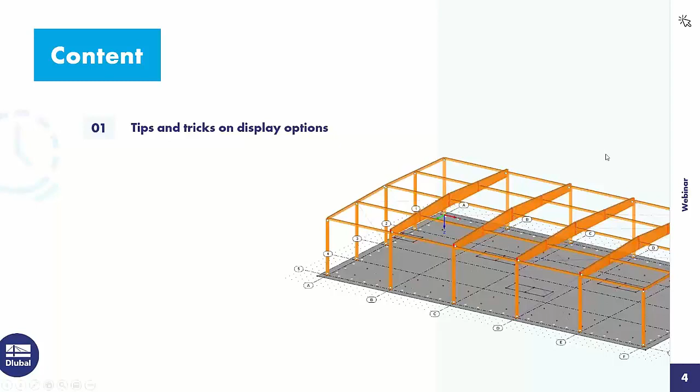To the agenda today: I will introduce some tips and tricks on display options, also on the printout report, and basic information. I will do a single and mass print of graphics to the printout report. And I will show how to create a verifiable printout report. We turn directly to the program.

In RFEM, that's a storage building made of timber and a reinforced concrete floor slab, with bracings from steel. The model is completed and designed: the timber structure and also the concrete structure. We can go through the load cases: self-weight with roof loads and single loads from racks, snow load, the imposed loads with loads from forklifts and from the racks.

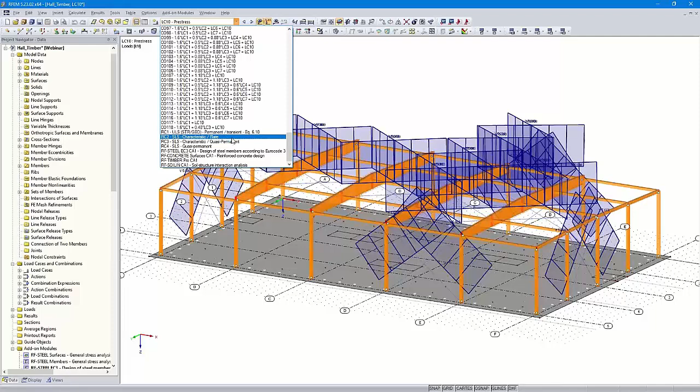Wind in X direction and Y direction. Imperfections in X direction and Y direction. Pre-stress. And then there are a lot of load combinations that are automatically created by the program. Also four result combinations: one for the ultimate limit state design, three for the serviceability limit state design. Then the design of the steel structure. Those are only the bracings. You can see a design ratio of 55%.

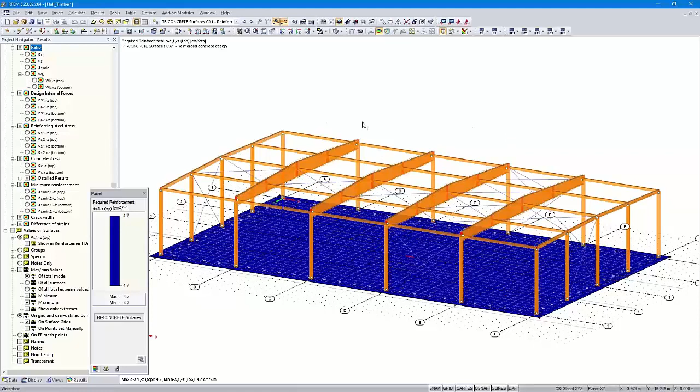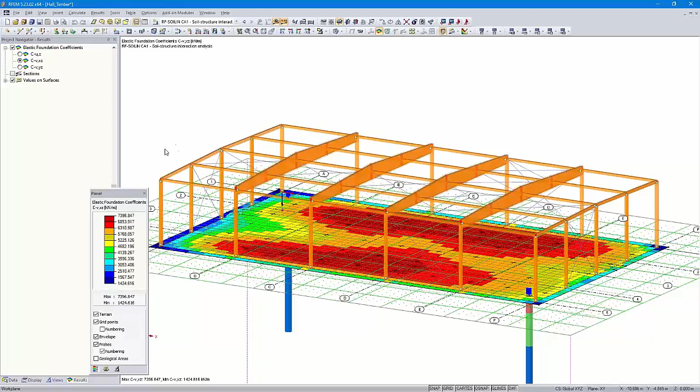Then the concrete results, also for the floor slab. Then the results of the timber design. Here you can see a design ratio of 94%. That's in the horizontal beam here, the maximum design ratio. Then I used RF-SOILIN to determine the elastic foundation coefficients. But we want to start with the member results. We want to print them in the printout report.

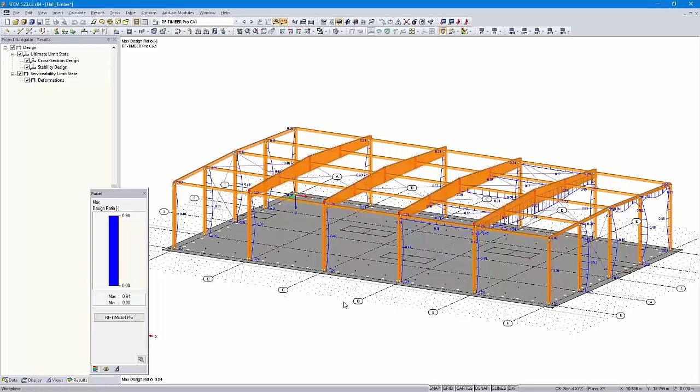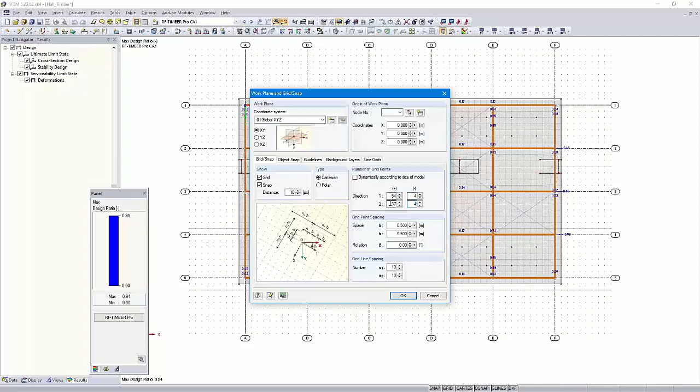But at first, I would like to move the axis designations closer to the model. I can show you how to do that in the top view. We go here with a right click in the grid options, edit. Here 'dynamically according to size of model' is checked. We uncheck it and then I subtract 5 here. Then you can see the axis designations are closer to the model.

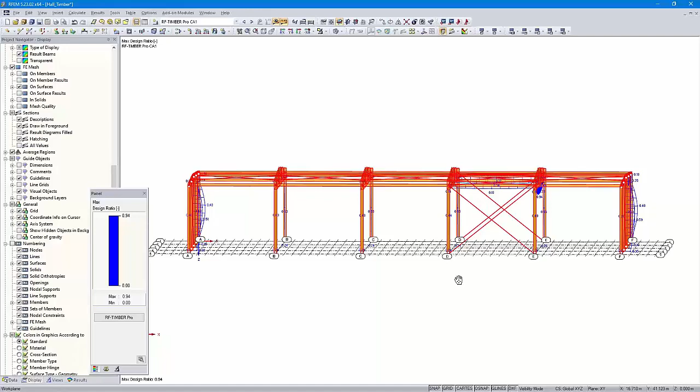You can also hide the axis in the display navigator under guide objects; you can uncheck the line grids and the axis would be hidden, but we would like to show them and document them. Then I make only the timber structure and the steel structure visible with the option visibility by selected objects, and the concrete floor slab is hidden.

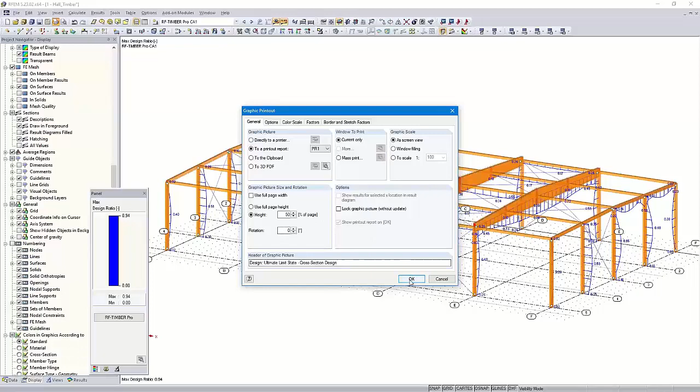Let's print that graphic in the printout report. Here above, print graphic to the printout report, the current only as screen view, that's the option I will use. Then the height, 50% of the page, no rotation, and I confirm that. Usually we would print the graphic with this option here for the printout report, input data and reduced results. But you can also use other options.

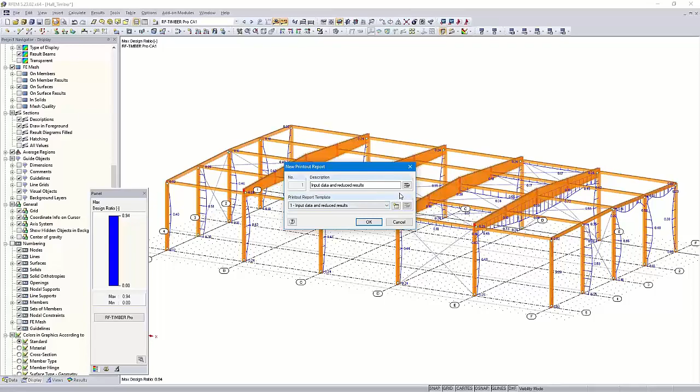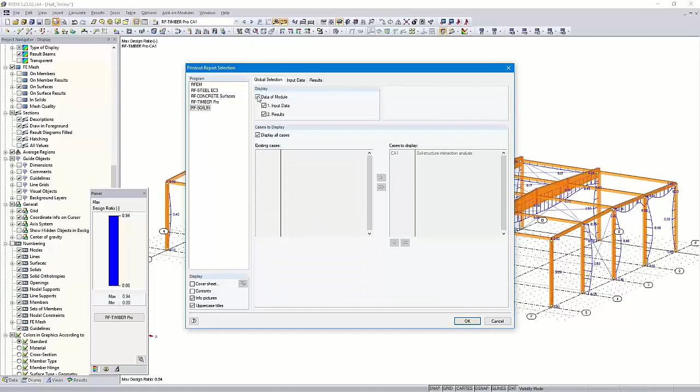But in that case, I would like to disable a lot of pages because we want to print the graphics first in an almost empty protocol, or in a protocol with not so many pages, and therefore I disable here the RFEM data and the RF-STEEL data. I leave the concrete and timber data because we would like to print graphics in those chapters. And now a printout report with only a few pages is created.

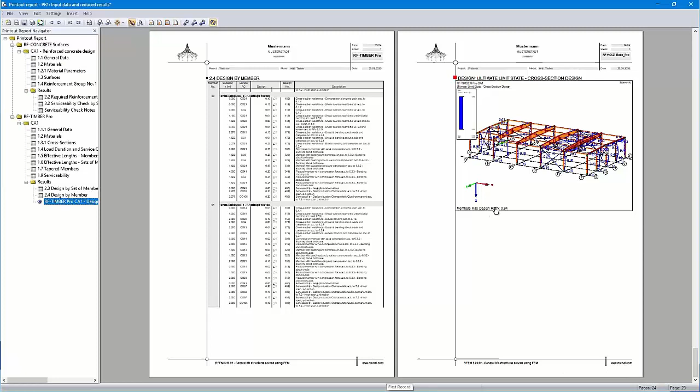At the end, we will have more than 170 pages. Now there are only 24, and the handling of the graphics is much better. We can see that the graphic is quite confusing, but we can modify that afterwards. By right click, I can open the properties and rotate the graphic. At first I use the full page height and rotate the graphic 90 degrees. Quite better, but I'm not satisfied with this graphic.

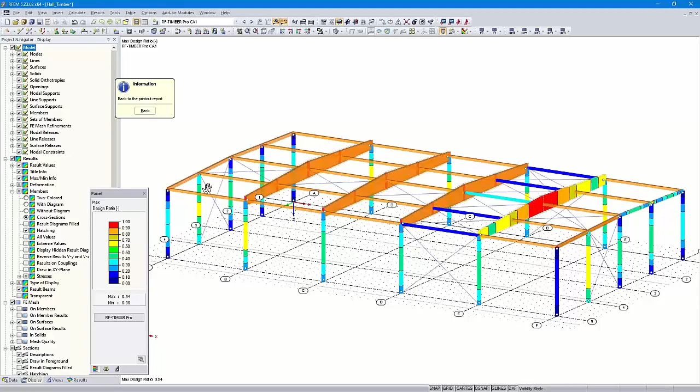I will change it here with right click and edit. I go back to RFEM, and then I can set in the display navigator under results, members, the option two-colored. That's the current state. Then with diagram, it's colored here. Then without diagram, and cross sections. I think that's a good overview. You can see the maximum design ratio is in the horizontal beam here, and I can go back to the printout report.

Okay, that graphic is much better. We will use it, and we would like to print that graphic of the axis E separately in the printout report. We leave the printout report with saving that graphic.

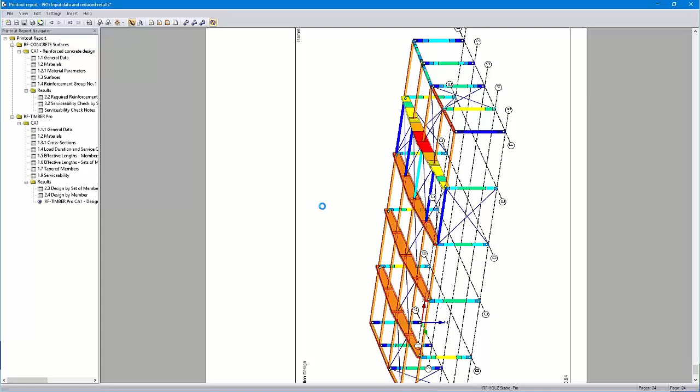Then I create a new visibility. I use this option here, it's the same as when I click on the right mouse key, visibility by selected objects.

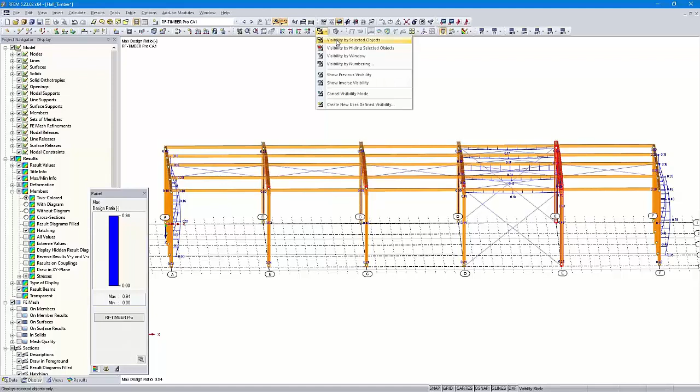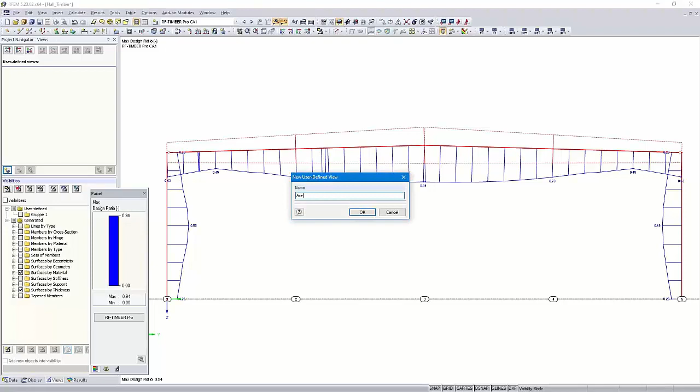I use the wireframe display mode, and we can create a view. For example, here, create a new user-defined view. I can call it axis E.

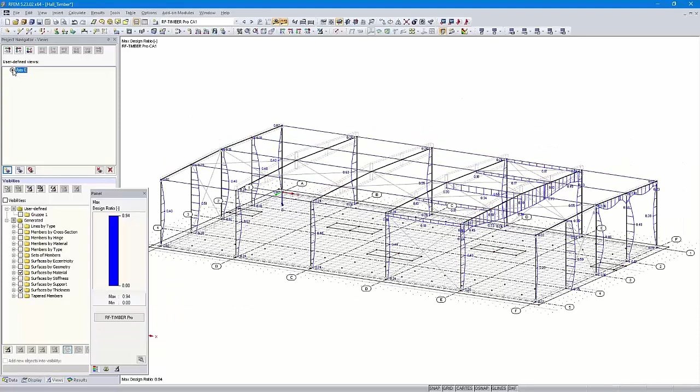You can go back easily later to this graphic. I'll show you - I cancel the visibility mode, for example this view, and I click here to axis E and come back to this graphic.

Here you can see the 94% design ratio. We print that graphic, that's quite easy now.

Now also that graphic is created. It's quite sufficient. I could make the panel smaller here with properties.

I can use a color scale and width of 20, at 20%.

That looks better. I could move that to the right side a little bit, but I don't do that. We leave the protocol with saving the graphics.

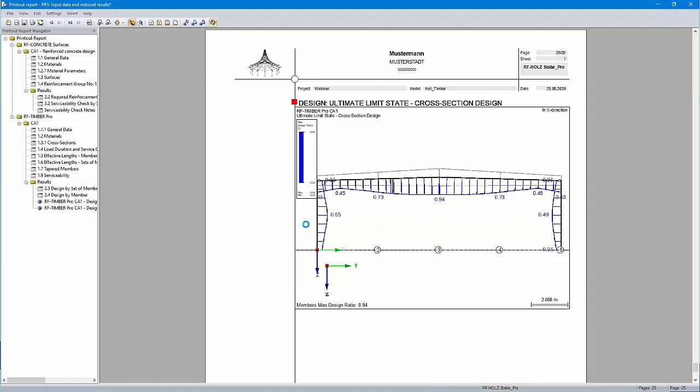And then we print the reinforcement results.

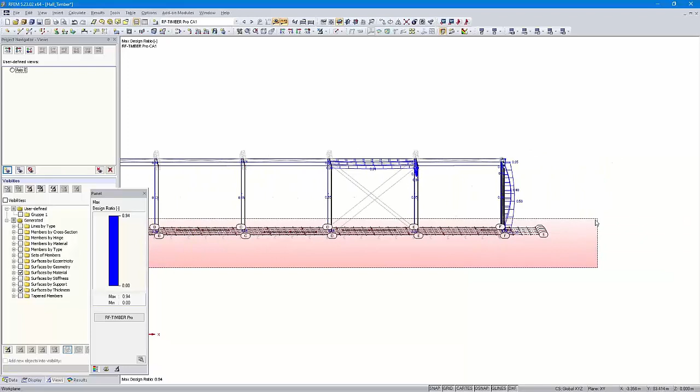I choose only the concrete floor slab in the view. Just a moment.

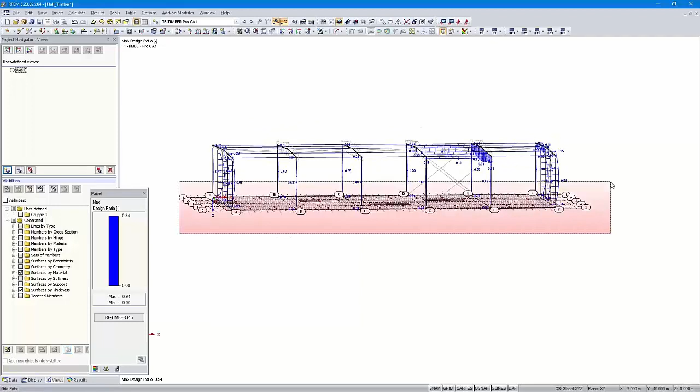A view in Z direction.

A small tip: when you zoom in and out in a graphic with the mouse wheel, you can see steps. If you want to zoom in and out without steps, you can press the Shift key and the middle mouse key, then move the mouse back and forward, and you can zoom in and zoom out continuously. Just a small tip.

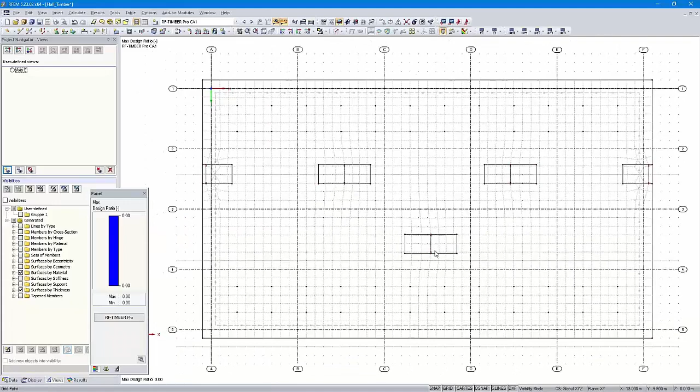Then we go to RF-CONCRETE Surfaces and the results.

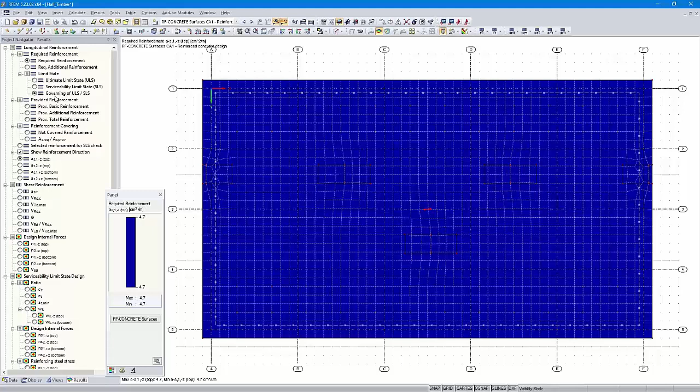Those are the right results, governing of ultimate limit state and serviceability limit state. You can see there are almost the same values in the concrete floor slab because of the restrained design.

I use in this webinar the graphic of the ultimate limit state design. The graphic has more different values.

You can see here the values between 0 and 2.7, and 0 and 2.8. Those graphics are more informative.

Okay, I could print that graphic. That would be absolutely sufficient. But I would like to do a task that is more difficult.

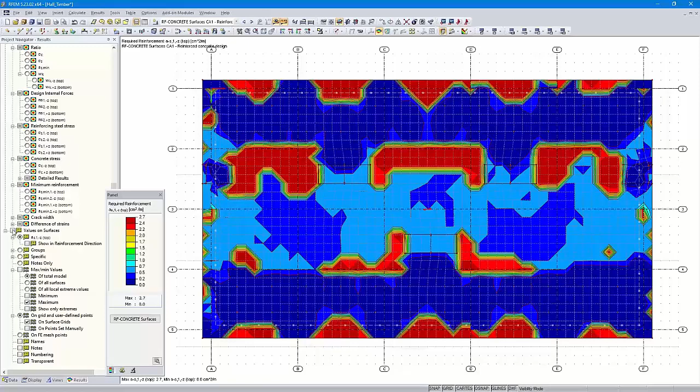I would like to print a graphic with all values in all grid points. I check here values on surfaces, on grid and user-defined points. And when I have got here all values, I can use here not the ISO bands, but the ISO lines.

Then I test the print. I print the graphic. I use the full page height and rotate it 90 degrees, and we will see how it looks like.

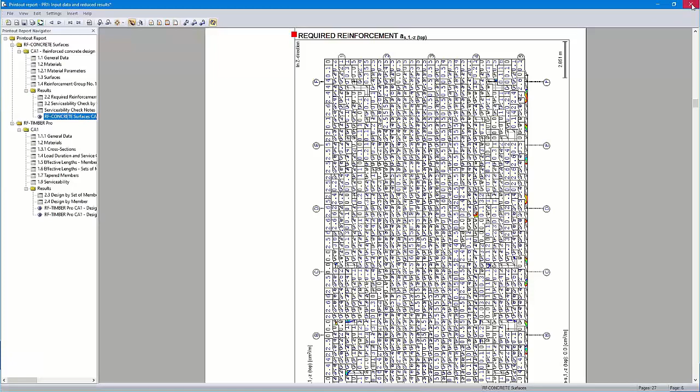Now we can see the values are too large. The graphic is quite confusing, and we leave the protocol without saving.

By right-click at one value, we can open the display properties, and we are at the right place here, result values on surfaces. We can change the settings here separately for the screen and the printout report, but we can also use identical settings for both.

We change only the settings for the printout report. I use here for the values the black color.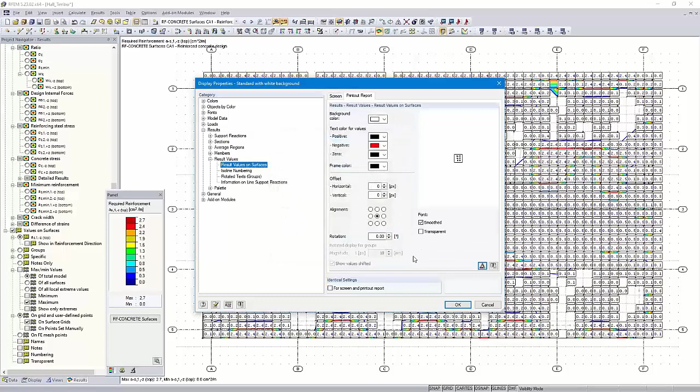Then I delete the arrow here. Then I move the values to the middle of the grid point, and I change the font size to 4. That's in German because my Windows is in German, but it doesn't matter. So, okay.

And then we print it again, same settings. Just a moment, and then we will see that it looks much better now.

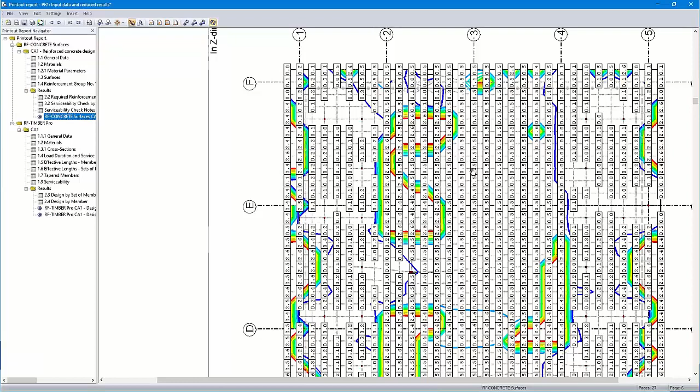Yeah, now we can read all the values here. At least for a PDF print, it would be absolutely okay.

Then we leave the printout report because I would like to show you a mass print only for 4 pages, for the 2 directions here, and for the top and the bottom means the reinforcement.

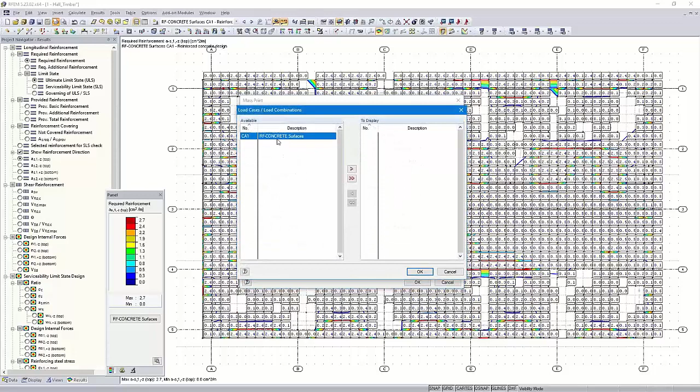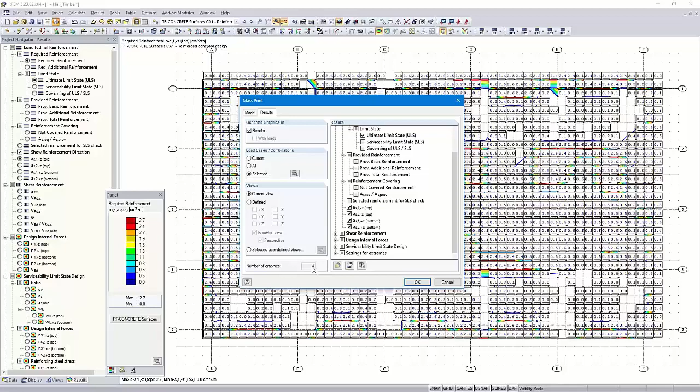I go here to print again and choose here mass print. I change the mass print settings and select the concrete surfaces, module data, choose here ultimate limit state design and AS1, AS2 for the top and both for the bottom. I could also add other graphics, but for this example, 4 pages or 4 graphics are sufficient. You can do that the same way if you want to print more graphics.

The mass print works for member graphics or graphics with member results as well, but I would like to show you the function for the surface results. Okay, just a moment, and then all graphics are visible.

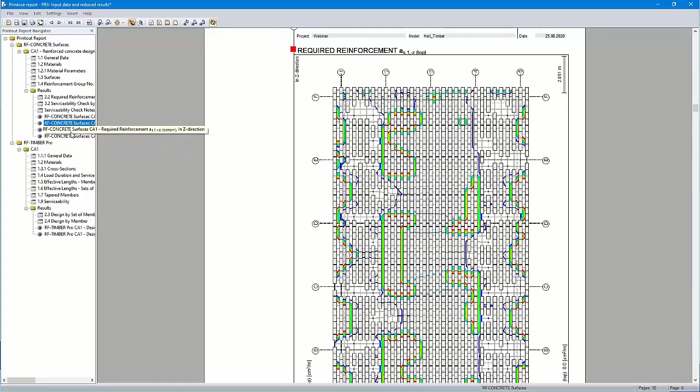I click our graphics here. You can see it's okay.

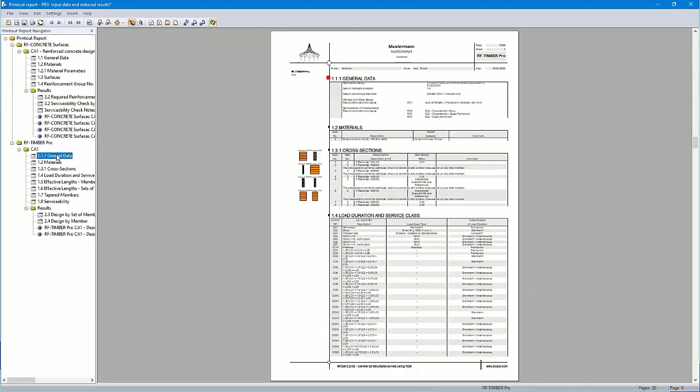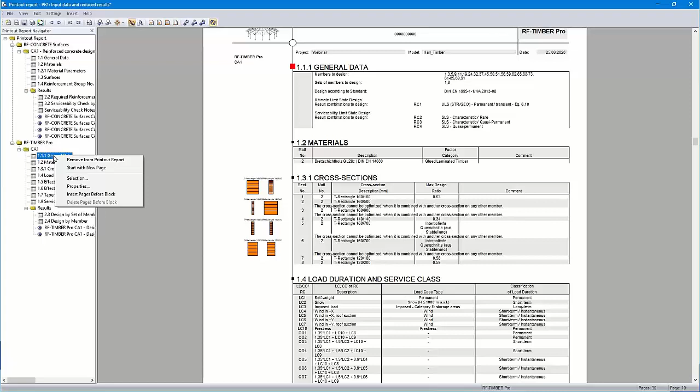Okay, a small tip. For example, if you want to add comments, etc., here in the left column, you can click with the right mouse, then properties, and you can add text. For example, design notes. Just an example. Here you can see it.

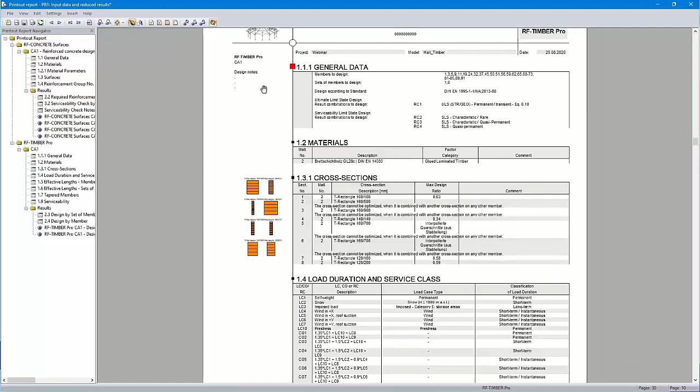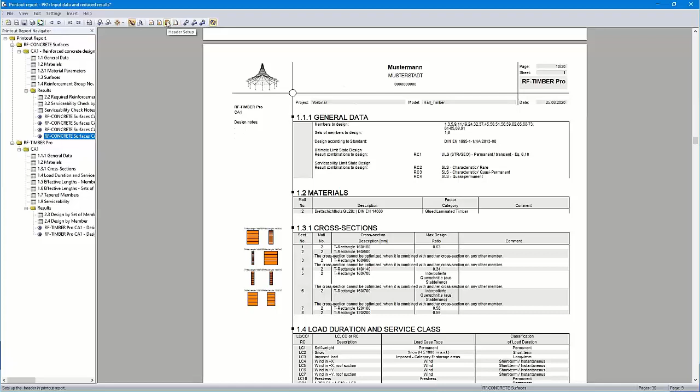Just a small tip. Okay, then some basics. For example, we can create a header by clicking here, header setup. We can open the library and create a new header. I already created a Dlubal header with the name of our company and the address and the logo.

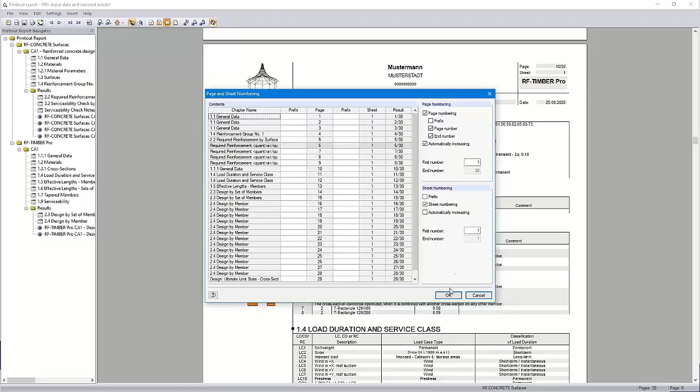You can change the first number of the protocol, for example. Here in the settings, you can add prefixes, etc. So the header should be okay now.

Yes, okay. Then we create a cover sheet, here with cover setup. You can also show the picture of the model automatically. I can add some text here. I prepared the text, it's only fictive text.

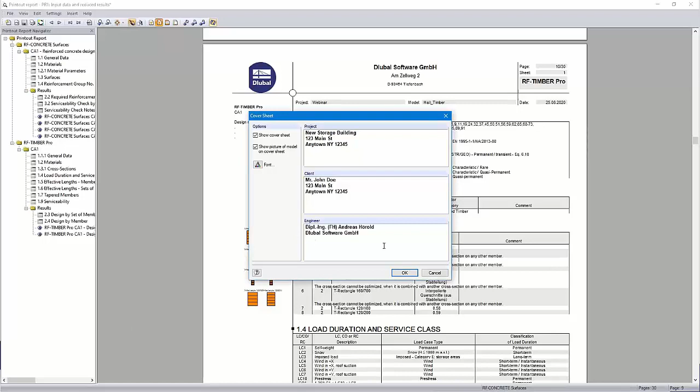But we would like to do the printout report complete. Okay, that's the cover. Okay, you can see that takes not much time.

We can go to the next point. You can insert text blocks, text files, images. Now I will add a text block.

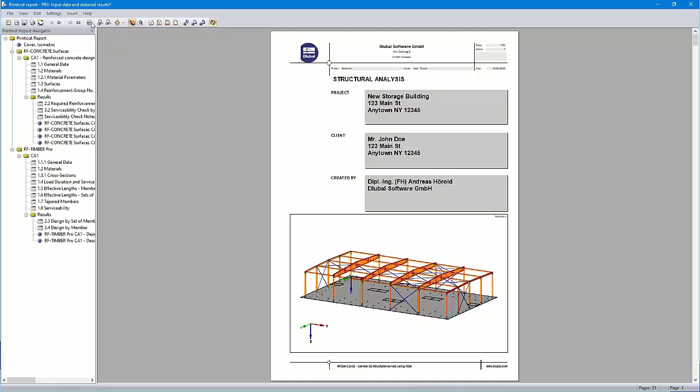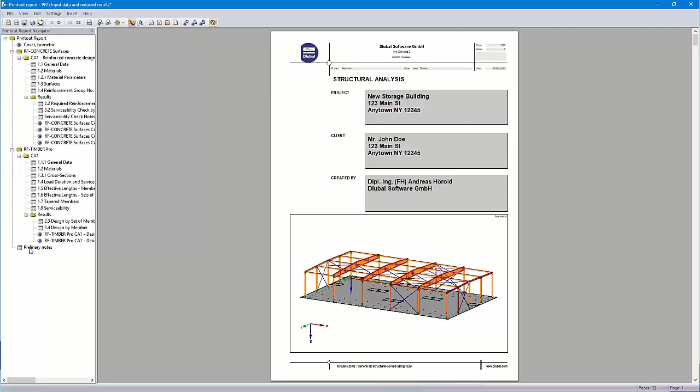Here the preliminary notes. I have prepared also some dummy text. Only the first sentence is correct, the rest is dummy text. It will be added at the end of the protocol, but we can move that later on to the right place.

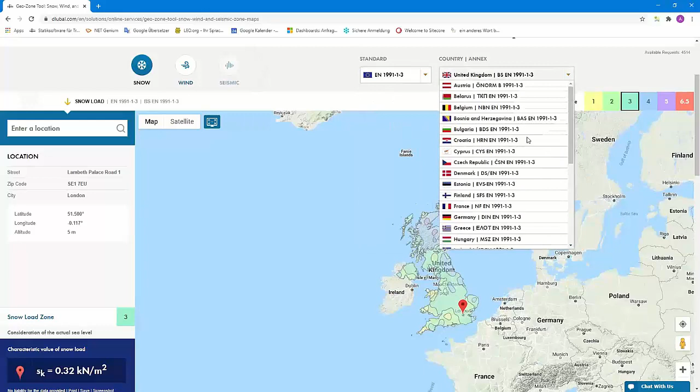I will add an image from a clipboard. I go to our website, and here under solutions, you can find the online services, for example the GeoZone tool, cross-section properties, the glossary. I think some of you know that tool already. It's for free. We have got a lot of standards, international standards, also the Eurocode with the national annexes. I use Germany here. I entered the address of our office in Leipzig.

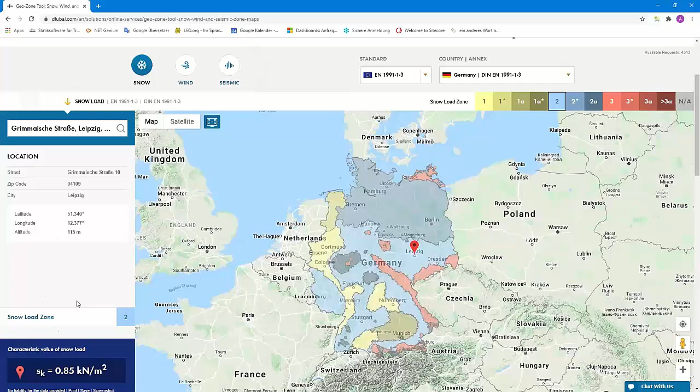Okay, and we can see here snow load zone 2 and the characteristic value of the snow load. And we can create a screenshot.

Then we can open it with an image tool. For me, that is Snagit. I can copy it to the clipboard and then insert it into the protocol. I call it snow load zone. Okay, and you could do the same with the wind loads, etc., earthquake load zones, and so on.

Also other graphics. Okay, in the next step, or some other tip now again.

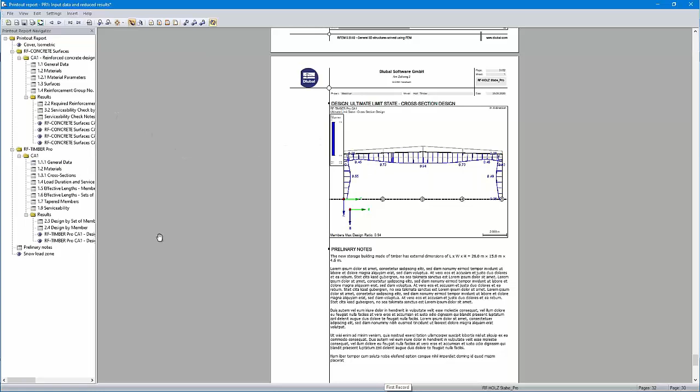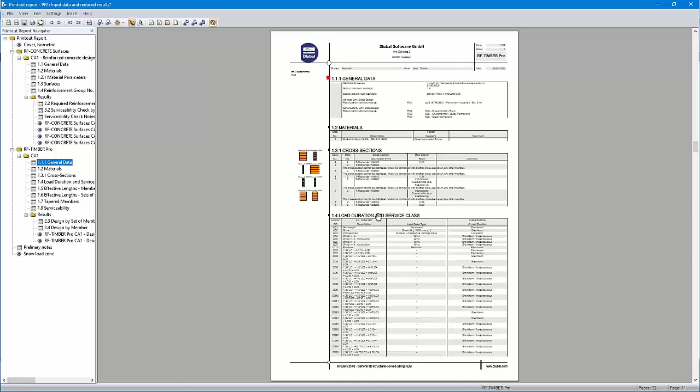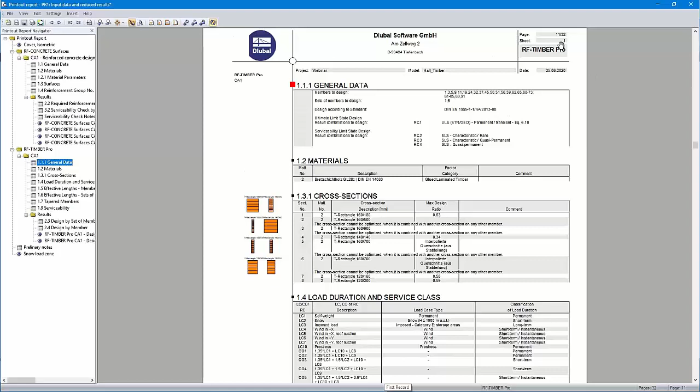You can add empty pages here. For example, you would like to add pages from external programs, etc. in your protocol. And then you see here, or here, that is page number 11. And by right click you can insert pages before the block.

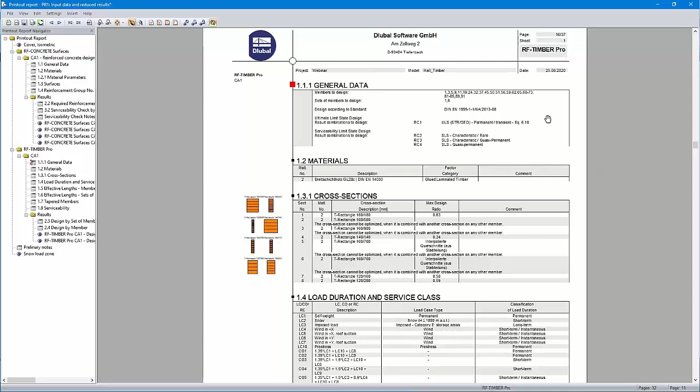I call it test and 5 pages. Okay, and then you can see it's page 16 and this page is page 10.

But I will delete them. Okay, just for info. Now it's page 11 again.

And the next step is select the topics. First I check here contents, we would like to show the content. Then the RFEM data, I choose then the steel data. Those are already in the protocol.

Okay, now you can use that settings which you like. Yeah, you can disable some content. For example, I will disable here the results of the load cases and load combinations.

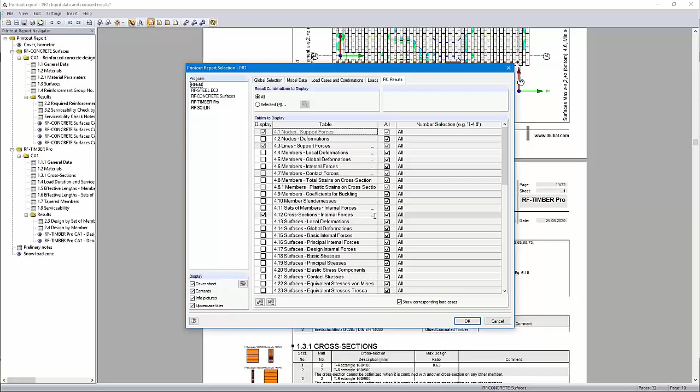And use here another setting for the cross-section internal forces. I choose here not the partition values, but the extreme values of the cross-sections. Okay.

Therefore, the protocol will not have too many pages. Okay, then the whole protocol is created in a few seconds.

So you can see all the module data. I moved the preliminary notes at the beginning. Just a moment, you can see now we have got 170 pages.

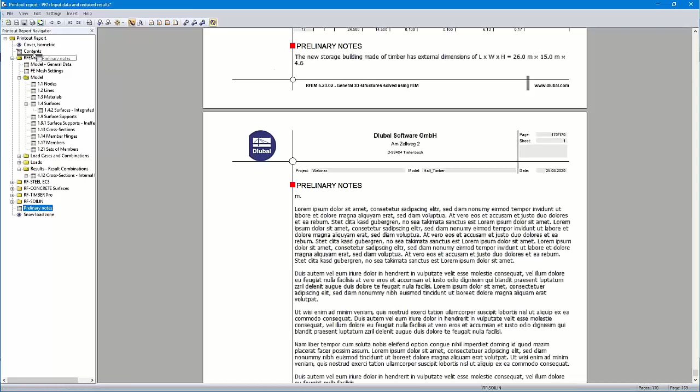So I move it behind the contents. Okay, now our pages will be renumbered, it takes some time. And I moved this snow load graphic here in that chapter. I have to wait some seconds. Okay.

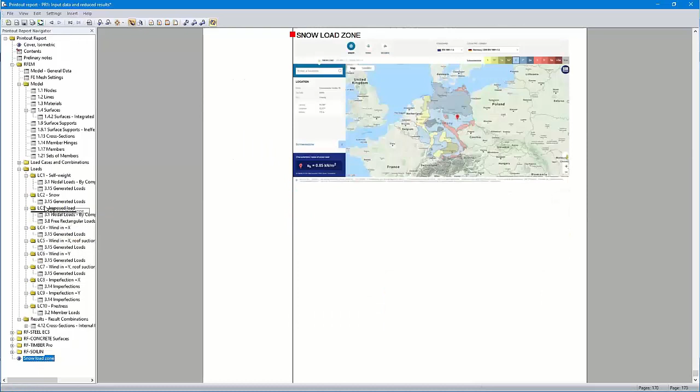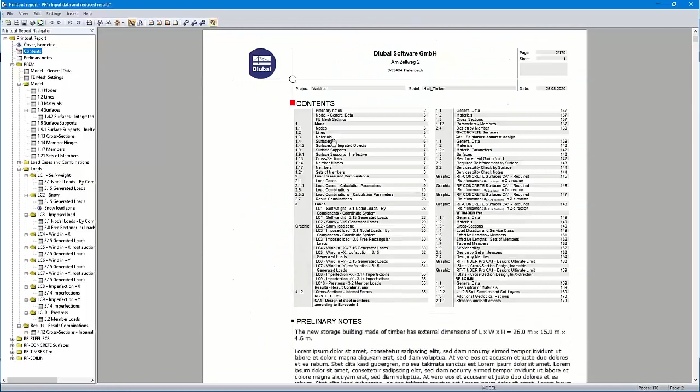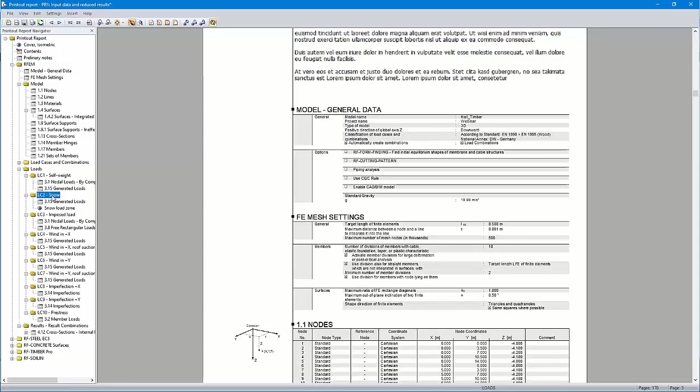So we jump to the preliminary notes. The cover sheet, the contents, preliminary notes, and then the RFEM data are shown. Here, snow, the generated snow loads, and the graphic from the Dlubal homepage.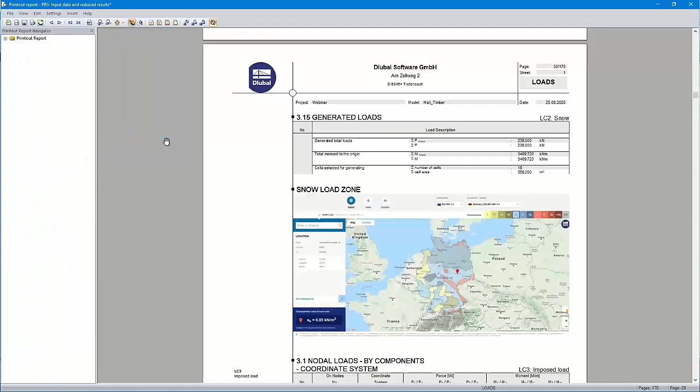Then it's possible to translate the protocol. There are 13 languages available: German, French, Italian, Russian, also Chinese, etc. By clicking here to French, the whole protocol will be translated in a few seconds. You can see here the text is already in French.

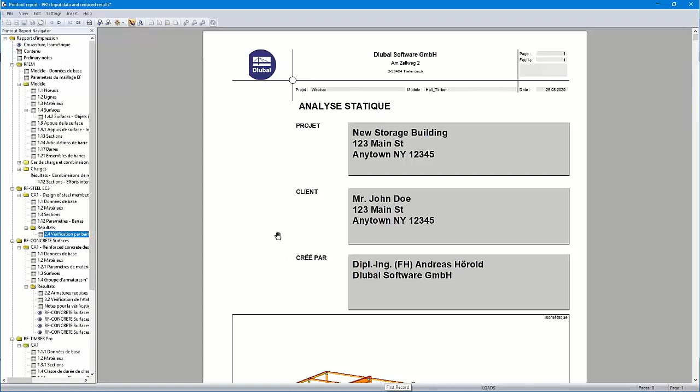Okay, just we have to wait some seconds. I will show you some other parts. Here, the whole protocol is now in French. We translate it back. Okay, that will take some time.

You can export the printout report to VCmaster, for example. How to do that, I would like to show you with the help of a knowledge base article. Sandy Matula wrote this article, and she did also a short video where you can see how it works.

You can also print the printout report as a PDF, etc., on my printer. I can show you file, for example, export to PDF, export to RTF. That's a text file. You can print it directly to a printer, also to a PDF printer. I can start it. It would take some time. I cancel it, okay, and show you the complete report instead.

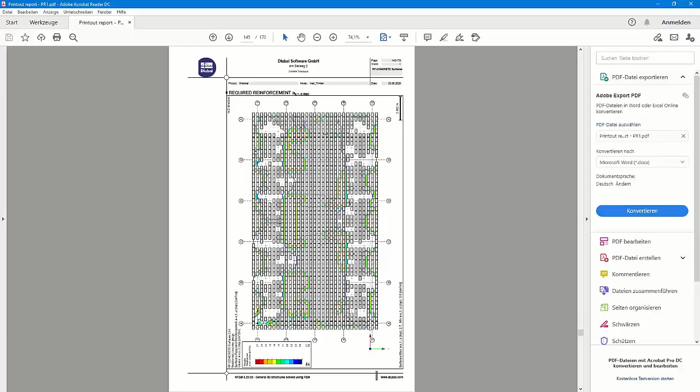That's the PDF. You can see the graphic here. It looks quite good. That's the whole printout report as a PDF file.

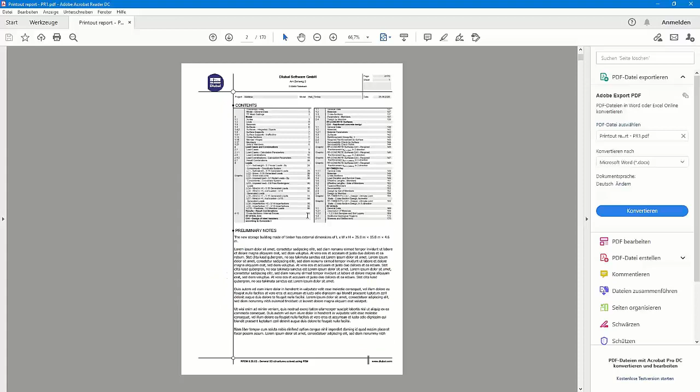Okay, another tip: you can save printout report templates. For example, you can use those settings here for a new template. Then you need to choose 'new from current printout report', and then you can enter a name and save it. You can also save a new template. You can here check and uncheck the chapters that you want to display.

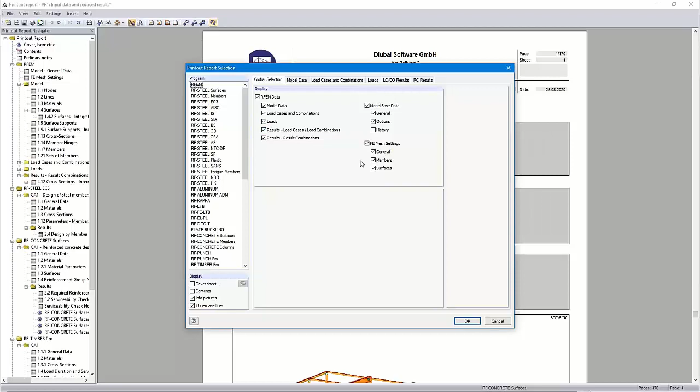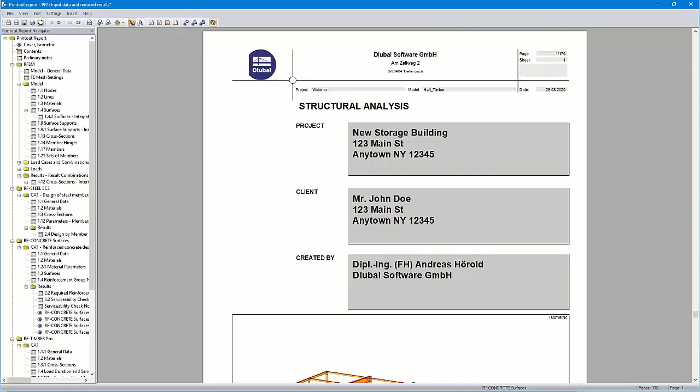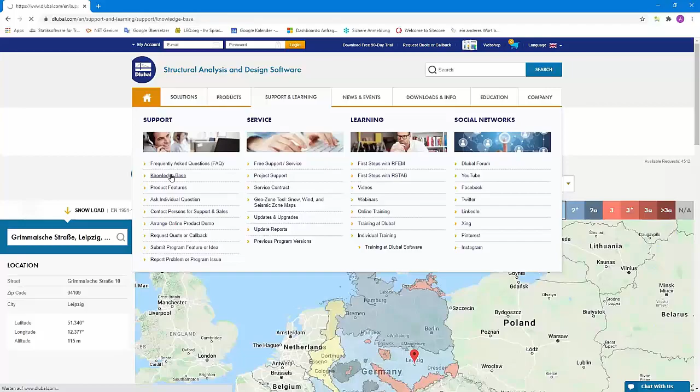Okay, as promised, I show you the article about VCmaster. Here under Support and Learning, you can find a lot of FAQs and knowledge base articles. I open the knowledge base database. You can see a lot of articles. I use the full text search for VCmaster, I searched already in the text for it.

Okay, here are 3 articles. I will show you the article export to VCmaster. Here's a short description. Here you can see that Sandy wrote it. Maybe we can take a look at the video.

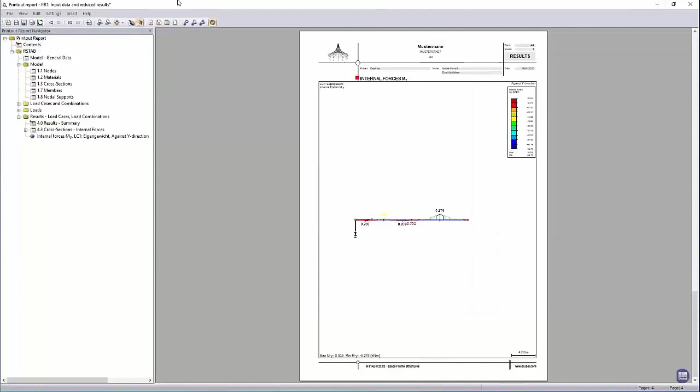Now with that graphic, VCmaster must be opened before you export anything from the printout report to VCmaster. Then you can click at the top to VCmaster, and then you can choose the pages that you want to export.

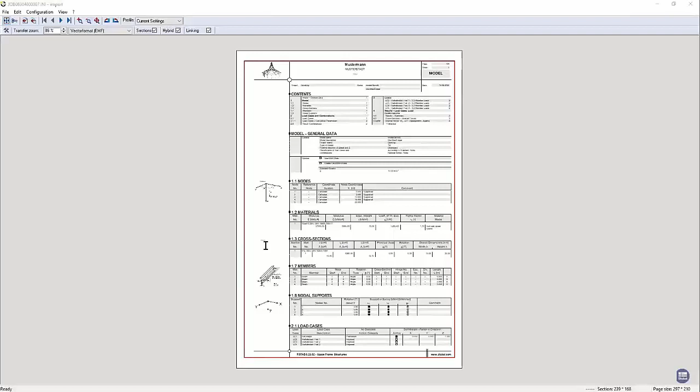This report has only 4 pages, and all pages are transferred in some seconds. Yeah, okay.

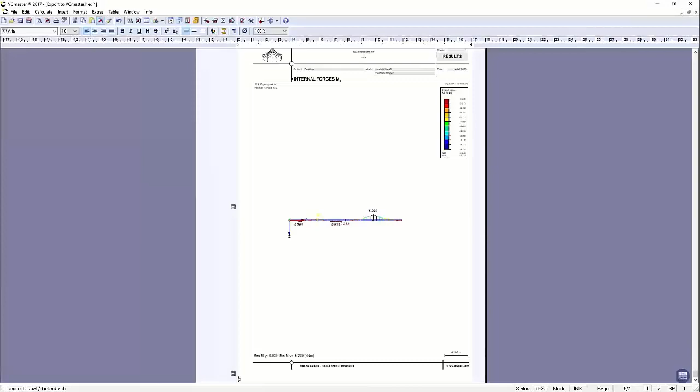You can also add to this VCmaster tool other printout reports, also from other programs. Yeah, it's quite easy to handle. Just test it. Okay.

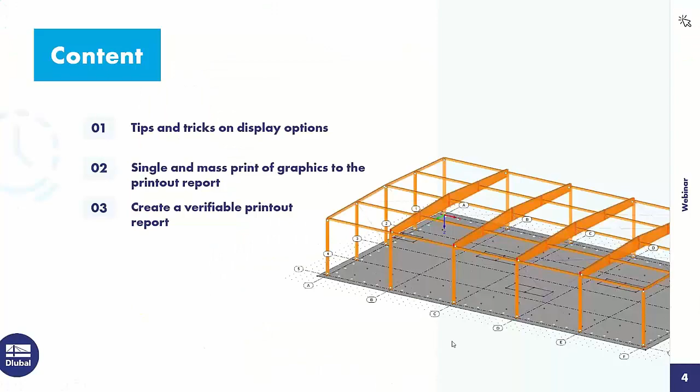Then I go back to the PowerPoint presentation. I would like to introduce you to some free online services. I already showed the Geo-Zone Tool with a lot of codes where you can determine the snow, wind, and seismic load zones, etc.

Then the cross-section properties tool. It's also a free online tool for standardized sections, and you can also define your own parameterized cross-sections and calculate the properties. I showed already also the FAQs and the knowledge base, a lot of valuable, informative stuff.

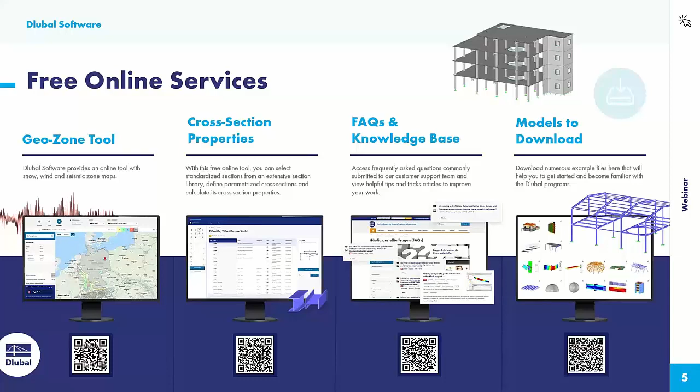Then you can download models from our website. The Dlubal engineers created them. You can find there also the model of today's webinar, and of our other webinars. Then I've got our YouTube channel with the webinars and the videos, all for free, of course.

Then the web shop with prices. You can create your own offer as a PDF. You can configure it by yourself. Then use our trial licenses for programs that you don't know, for example, RWIND Simulation, SHAPE-THIN, SHAPE-MASSIVE, etc.

And we offer free support via email and chat. You can find further details on our website, dlubal.com.